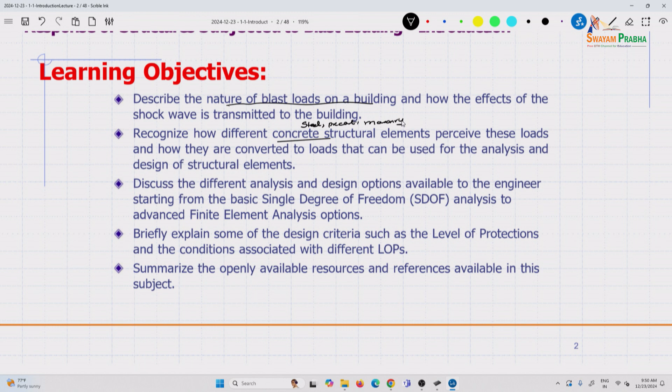I did work a lot back in my engineering days as a field engineer using IS 456 and IS 800, but unfortunately I've been using ACI and AISC documents for the last 30 years. So in some of my design presentations I'll explain those fundamentals, so I'm sure you'll be able to relate to that as well.

One of the reasons we are doing some of these things is the UFC that I'll talk about shortly. A lot of units are also based on FPS, or US customary units as they're called, foot-pounds and seconds, rather than MKS or SI systems, because the documents we will use are based on that unit system. But it's easy to convert, and we'll see if we can provide some conversions as we go along.

So you'll recognize the elements, how they perceive the loads, and how to convert a complex wave phenomenon such as a shock wave into a load that is transferable for design purposes and for analysis and design.

Then we also look at the different analysis and design options available to the engineer. In terms of analysis, we will look at a basic single degree of freedom analysis. You can do a lot of elemental designs just using single degree of freedom systems, and of course if you have done structural dynamics, you know there are limitations to it. But when we convert any complex phenomenon into something practical, we have to have tools that an engineer can use without a whole lot of background, so SDOF works in many ways. Complex analysis, as we will see, has its own limitations, accuracies, and modeling efforts, and so on.

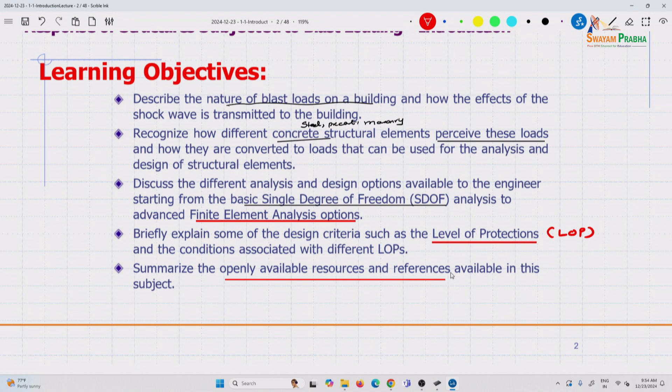This course is all based on open source material, so you should be able to download it. We're providing some of them here, but we'll see what are all the different available resources and references. I keep, even yesterday, reading an article, and there's so many new things you keep learning, reading articles from different perspectives.

What we will do is, okay, there we go. So the reason I use this is a very simple software. I use this extensively in all my classes because you can easily convert it into a PDF and then upload it, and you can download it later on.

So some examples, of course, we have a few examples in India itself. This is the Twin Towers that you've seen, 9/11, and this had actually fatalities were almost 2,000 to 3,000 fatalities.

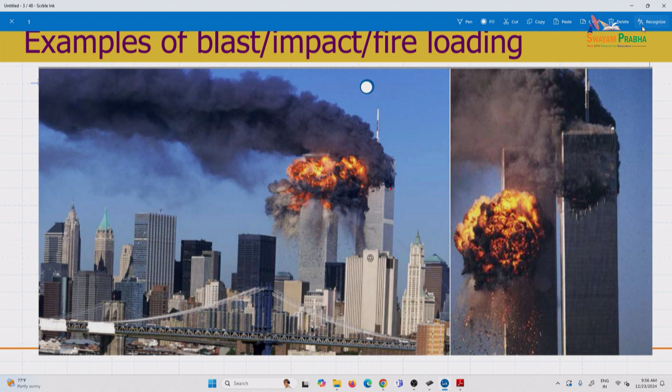Did I close it? I think.

So this had both blast and impact. Now, these are two different phenomena, physics-wise, altogether different. We can give an introduction to impact, but that will just barely touch the surface. This course will focus on blast effects on structures, because the physics, the designs, the equations, everything is very different, as some of you working in this area already know.

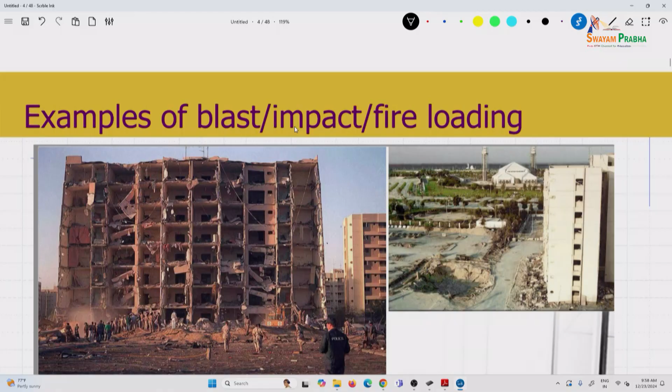Unfortunately, in structural engineering, disaster is what motivates further research. Back in the 1970s, there were extremely heavy earthquakes in the US, especially in San Francisco on the West Coast. Till then, research in seismic design was fairly minimal. But since that time, over the next 30-40 years, over $1 billion has been poured into research alone. Unfortunately, disasters are what force us to do further research, and that's what happened here as well.

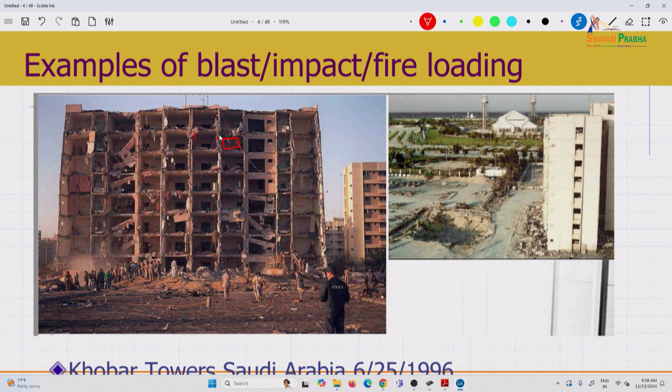So this was Khobar Towers, a residential complex. As you see, this structure was clearly not designed for blast effects. These are basically what we call curtain walls - most likely there's a masonry wall here, and another masonry wall, all separate walls. Clearly you can see the walls blown in. Observations like this prompt us to provide ways to not design in traditional manners.

Then the other effect - this is the Oklahoma City bombing. All of these, as you see, are fairly recent, from the 1990s. This is actually very close to where I live - I live in Kansas City, which is right in the middle, like Nagpur in India. This is about 2-3 hours from where I live, maybe 5 hours. This was a federal building with a courthouse. In the US, all federal buildings, the main central government buildings, are governed by a certain set of criteria.

They are not Department of Defense criteria - they are under what is known as the General Services Administration. So GSA has their own guidelines on design, and all these were designed originally as per GSA guidelines. The problem with this building is it was in an underground parking garage. There was a truck bomb placed near a very critical column.

When that blew up, it definitely blew that column away, but a concrete building is designed for a lot of load distribution and redistribution. What happened here is it was not designed for progressive collapse. So the main failure in terms of fatalities and everything you see was mainly progressive collapse. If the principles of progressive collapse had been applied to this building, perhaps it may not have had the impact that it has had.

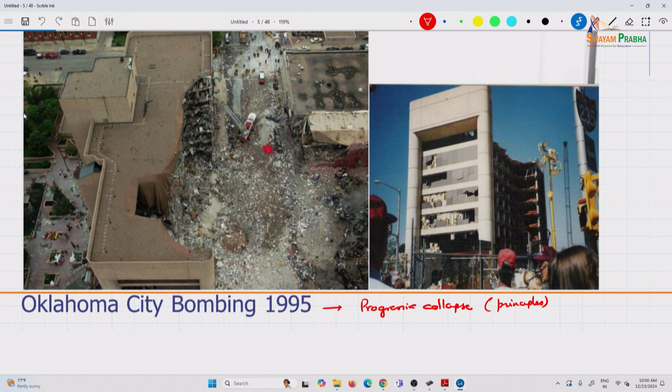That prompts changes to the guidelines in terms of progressive collapse and how to introduce those principles. There is a UFC for that also, which we'll talk about.

The other incidents I'll talk about are in Mumbai - the Taj, where you had almost 250 plus fatalities and also about 700 plus injuries. Then there's also the siege - I don't know the time, you might know it better. This also had in terms of 160 plus fatalities, and here about 300 plus injuries. So the effects can be fairly devastating.

But what we see is all this is an unusual event. The thing to keep in mind in terms of design - just like in wind you have return periods, and in earthquakes the same thing, you have return periods, though now there are other ways to quantify earthquakes. Same thing here - there is no return period. You never know what is going to happen. There are so many different factors, and that's what we'll look at later in the second session today.

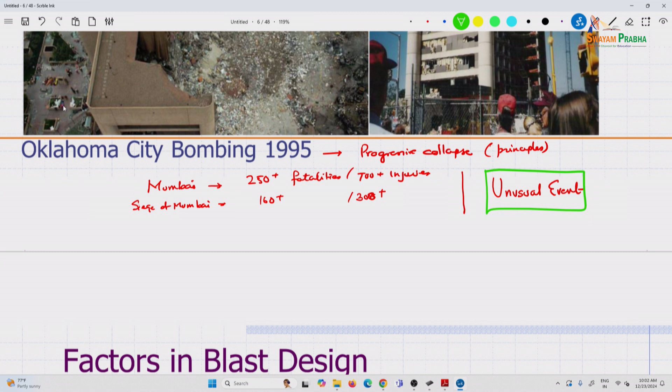So what are all the different considerations when getting into a blast design? First thing to keep in mind is this is going to be an unusual event. How do we consider an unusual event? The threat loading - when you look at dead loads, live loads, earthquakes, seismic, wind, whatever - they're all well defined. In the US, we use ASCE 7, now it's the 2022 edition. So anything as far as loading purposes goes, it's a standard - ASCE 7. India also may have an equivalent standard.

ASCE is the American Society of Civil Engineers. They have committees, and committee 7 works on this. When I started teaching, it used to be a very small document, but now it's such a thick document because they incorporated all the seismic practices into it.

The Eiffel Tower was designed over 100 years back, and the code probably wasn't even a code at that time. It still stands, and it's one of the most popular civil engineering monuments. But now we've boxed ourselves into so many constraints and very standardized buildings, but it is needed as time goes on.

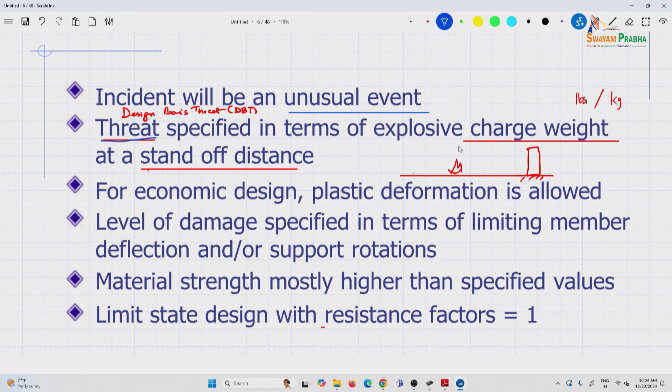So anyway, you can see this is R going up to there, and this is the weight W.

Then for economic design, just like some of you are working in seismic design of structures - in seismic design, in normal designs, in the US we have strength design, and stress design is out, but there's an equivalent called ASD, allowable strength design, in steel structures. But in all those cases, those are all factored loads.

And here, when you're designing normal, say tall structures, you're still designing at peak capacity. Every room filled with live load at the same time, the behavior is still elastic. You are not designing for plastic considerations, but of course under factored loads.

So in seismic design, depending on the expected performance, now you have performance-based designs and more. Depending on that, you do have to go to plastic design, and we'll talk a bit about designing for plastic behavior - there's a session on that as well, elastoplastic behavior, or more plastic behavior.

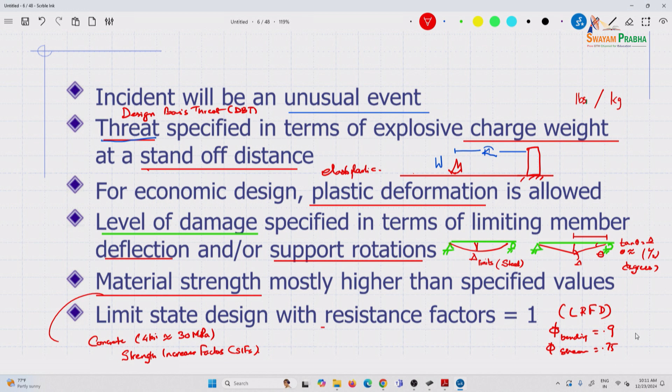Finally, the limit state with the resistance factors, we use the load and resistance factor design, LRFD. They have different factors depending on the type of material, steel or concrete. For example, steel in bending could be 0.9, or in shear 0.75. These are strength reduction factors, but in blast we assume it goes all the way to 1.

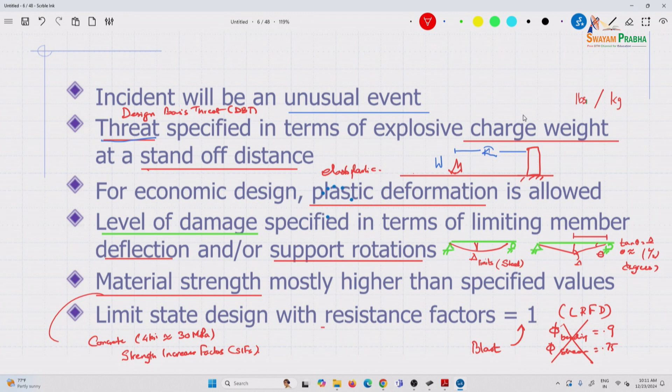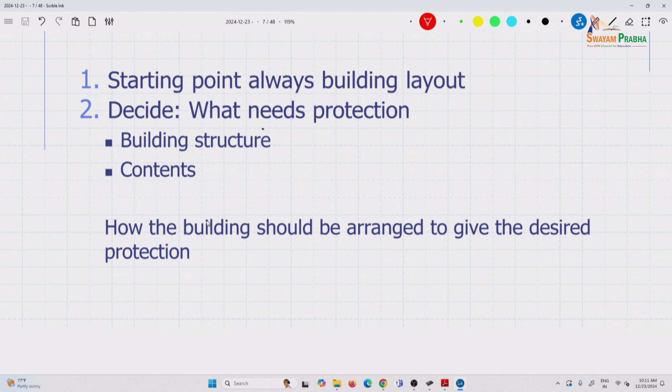In terms of the design philosophy, the starting point is always the building layout. If you're working in the US, buildings designed for blast, nowadays bridges are being considered, although codes have not incorporated this yet. People are working on it, there are guidelines, books, and articles on that. But for buildings, all DoD structures, all embassies, State Department structures, and all federal buildings are designed for blast resistance. The starting point is always a building layout.

For example, if this is your available land, suppose this is your building layout, and your building has a shape like this, and this is your access roadway. Things to consider in design are these distances, R1, R2, and so on. Other things to consider, just a few examples, would be R3, these are all standoff distances.

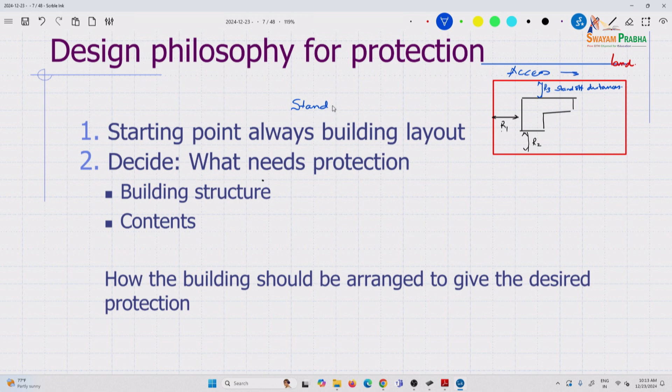If you recall the Oklahoma City bombing, that was adjacent to a road. Whereas for other types of structures, if you can design for it and afford it, the standoff distance is, as you will see later, the most important element in preventing failure for the structure. The greater the standoff distance, the better it is.

If you can afford it, and if you need to keep certain critical structures, for example your computer room or anything critical, your HVAC facilities, as long as they are away from access, you orient them accordingly, and this is something you have to work out with the architecture. Quite often architects are the first people to start this process, but as a blast engineer you have to get involved at that stage and work with the architects.

So the building layout is one of the most important aspects of it. You decide what needs protection. There are two things to consider. Quite often, as in seismic design, there are building categories based on whether it's a hospital, fire station, or a normal structure, but here the contents go beyond that.

The contents, as you will see, include a whole array starting from people, so people safety, any critical network or equipment you consider important for a structure. If it's a law office and you have to store records, all those kinds of things become important in the design of the structure. And of course, the building itself needs protection.

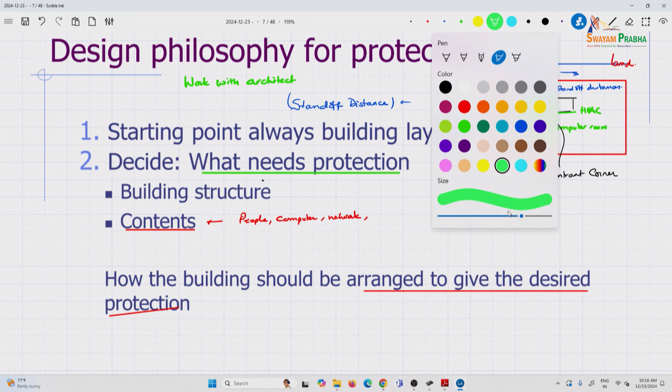Another thing that happens here is, for example, this is a re-entrant corner. So if you have a critical element placed here, this should be kept away from the source of the blast.

You're able to see what I write, right? The size-wise, is it fine? Okay, so let me know if you have any questions. So, meanwhile...

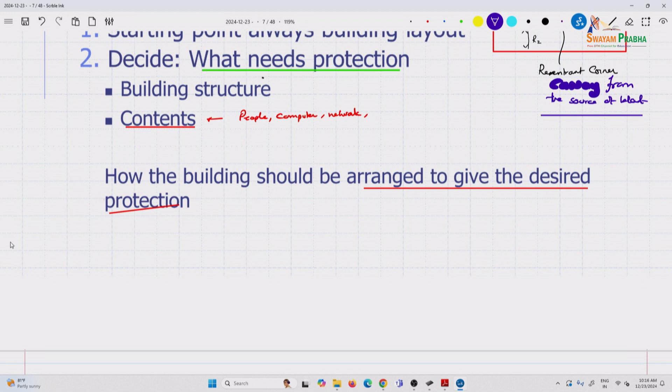Any questions so far? A re-entrant corner is where, for example, suppose you have a building like this, and this is the flow direction. Now at this corner, you can have vortices - that is a re-entrant corner.

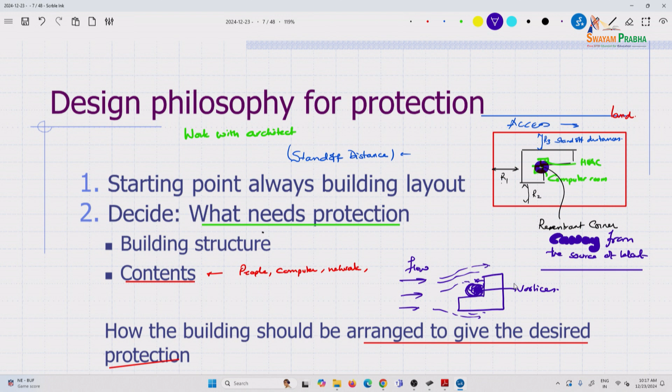In fluid mechanics, if you see the flow, it goes around here, but here the flow goes in, it can get reflected, and there is a lot of turmoil, vortex type. The reason you avoid re-entrant corners is that, if you can completely avoid them, that's the best scenario, because that way the uncertainty in the prediction goes down more than anything else.

So we looked at how the building should be designed. The next thing is, what are the building design requirements? As we talked about, the primary considerations that go in are...

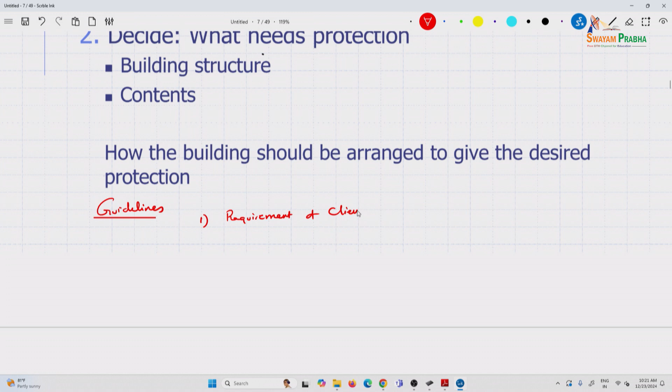There's actually another one I think we missed, so let me add that. Some of the guidelines here are: one, you first assess the requirements of the client. Then, once you have that, you look at the design features. I must mention here that quite often the client knows what they want, but as a

blast engineer, you have to educate people on what they can expect. It's not a product where you expect something and just get what you expect. Because of so many uncertainties involved, we advise every engineer who works in this area to clearly tell the client that what they get need not be exact, but these are what we know are the best practices in the field - just like doctors use best practices available. The outcome just depends on person to person. We take a similar approach.

Then the next thing to consider is the building form and facade. After that we go into the structural design itself - analysis and design. And then finally, we look at some of the internal design aspects.

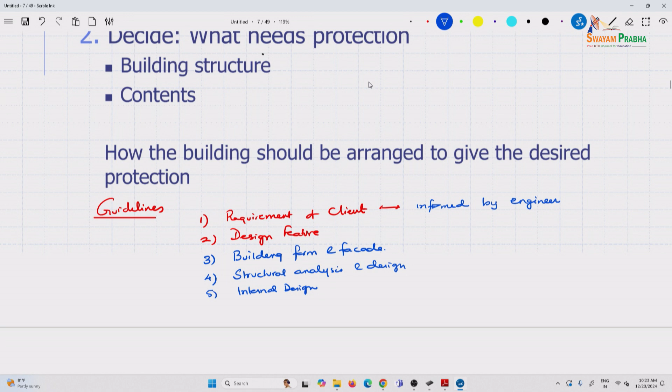For example, glazing, and doors - doors that open out are better than doors that open in. Minor considerations like this should be taken into account when designing internally.

So the building design requirements mainly aim to deflect the attack, whether by layout, security, or external devices to deflect such as bollards. These are very commonly used, along with protective walls outside. These are some ways to deflect an attack.

The next thing to look at carefully is why a particular building is being targeted. People don't choose a building at random - there's a reason they attacked the Pentagon, for example, or the Twin Towers. The mission is accomplished by choosing targets of high value.

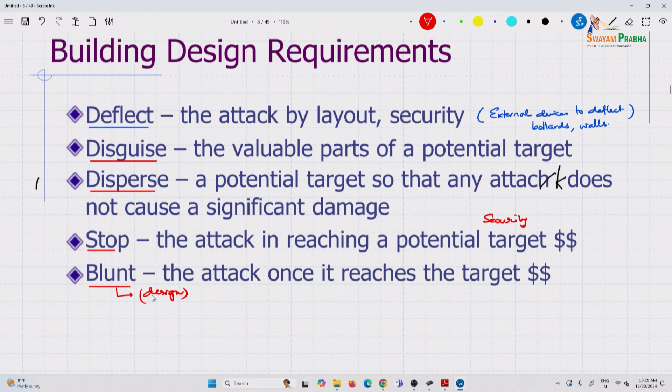So disguising the valuable parts of a potential target, and figuring out how to disperse it, means any attack does not cause significant damage. Of course, the best ways are all the security measures - TSA especially - to stop the attack. And if it does get through, this is where, as I mentioned earlier, the design comes in - this is literally the last aspect of any design of a building for blast.

I think I was a little ahead, so some of this is repeated. We'll look at each of the requirements of a client. The first requirement - there are 4 different things we'll look at - let's consider a typical commercial multi-story new building.

First of all, it is expensive to protect against blast, so as an engineer you have to consider why it is needed. If they move forward with it, that education has to come from you based on rationale - you come with reasonable calculations. Whatever we do this afternoon, we'll take up and say this is why, this is what it takes to protect that particular building, because clients, architects and engineers have a number of choices.

So the role of a designer is to advise the client based on basic principles, and some of these basic principles is what we'll cover over the next 10 days.

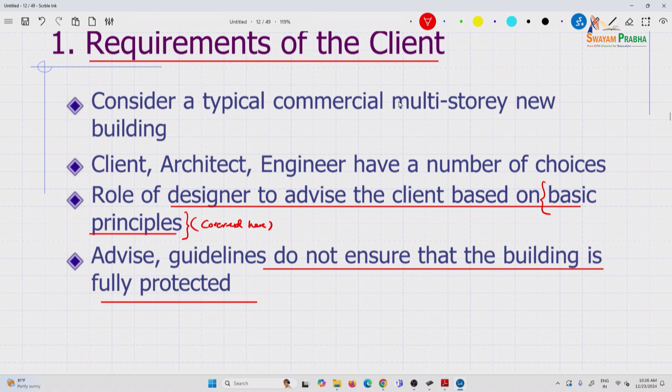Advice guidelines should remember that we do not ensure the building is fully protected. You have to clearly state that these are best practices, based on the requirements of the client. And how do you convey these requirements?

If it is a building offshore, we have for example ASCE 7, or it's a building on a coast with potential for cyclones and hurricanes, we look at what kind of wind speeds there are. We don't really need to tell a client, as an engineer I go to ASCE 7, look up the wind speeds, calculate my pressures, and design the building.

But here you have to talk about the different LOPs and where the client is comfortable in this case. We'll talk about different LOPs and how they come into the picture later in this course. Other things include blast mitigation, which we'll cover a little later.

Hardening the structure is basically adding components in addition to the primary structure, such as polyurea coatings or other such things, to harden the structure. Blast mitigation is additional things you add structurally in order to reduce the effect of the shock on a structure.

The thing that gets most affected, which as structural engineers we rarely get into, is glazing design. I've worked with glazing experts and they do their own analysis on different types of glasses they come up with.

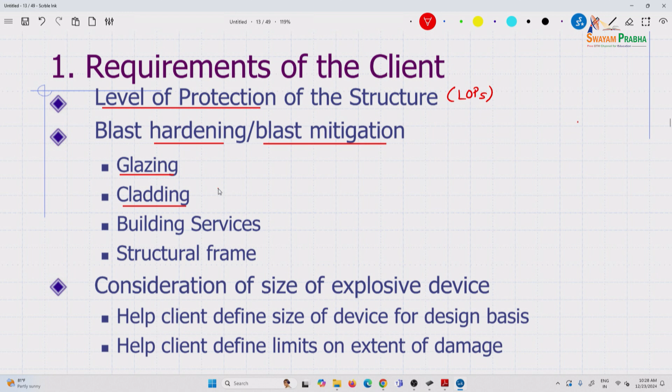Other building services include HVACs, lifts, elevators, those kinds of things, and then finally the frame. The level of protection leads to the consideration of the size of the explosive device, and we'll look at a few different types of explosive devices.

So you help the client define the size of the device, basically the weight in kilograms, and define the limits to the extent of damage. This is again based on the level of protection.

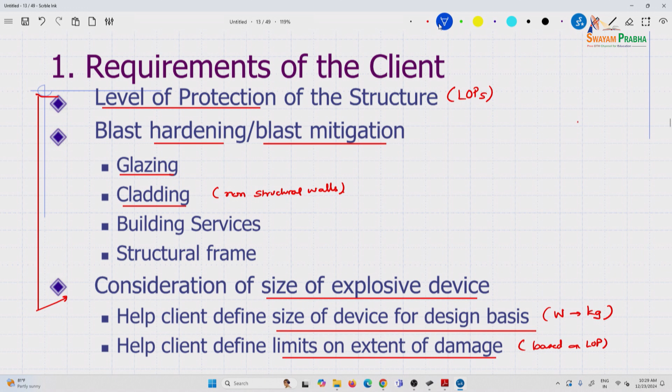The other things you can advise them on are based on your deflection limits or support rotation limits.

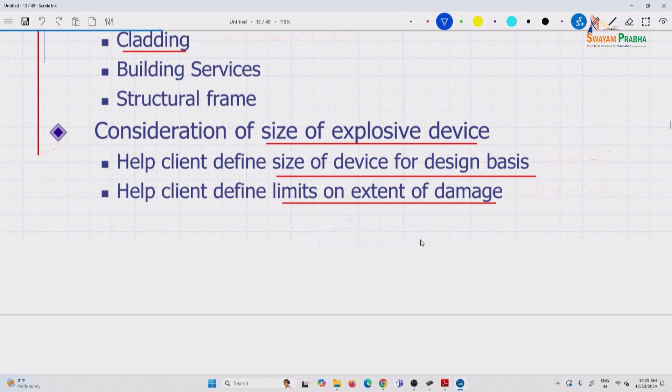So advise them, if the structure can go say 8 degrees of rotation, what does that actually mean to a client? How does it convert into what they have to do once that event has occurred?

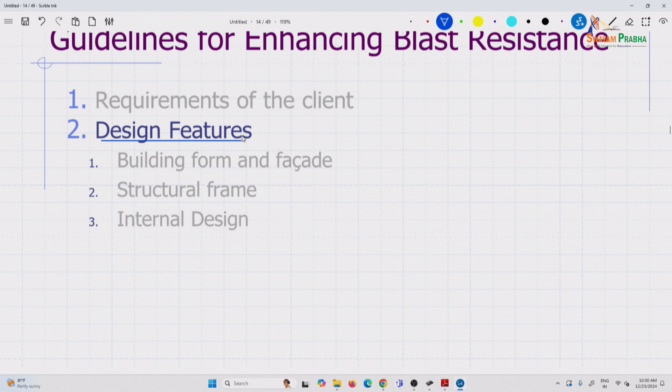Then a little bit on design features, and again this is very subjective, we'll just talk about it. Standard building design features can be at odds with blast protection and resistance. This is something we should all be aware of. Architect-engineer fights are very well known, right? You never see eye to eye. This can be even more challenging.

For example, floor-to-floor curtain walls in multiple stories designed for regular loads can be a hazard. You're changing the entire philosophy of that structure itself. In many buildings you see columns and beams, the structure goes up, and then they come in and put some masonry wall and you're done. But that's completely contrary to blast protection. That is a no-no in that case.

Form of facade failure, loss of life, internal finish - all these are different things that we have to consider.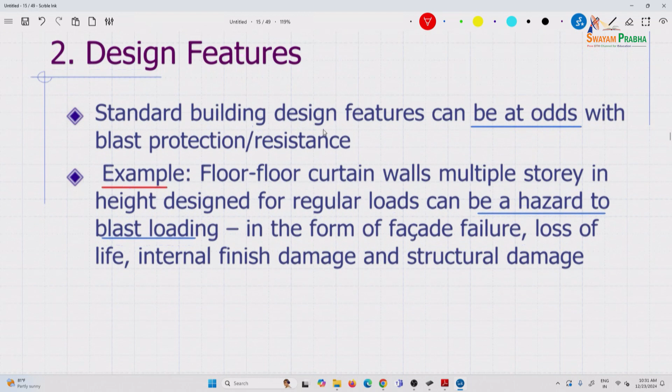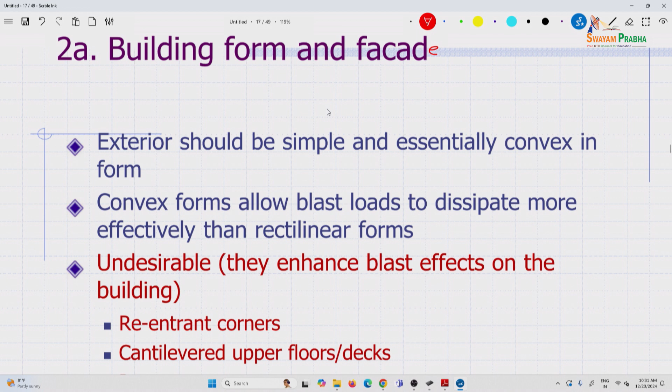Then looking further at building form and facade, the exterior should be simple and essentially convex in form.

Now why is this the case? We'll talk a little later about the type of pressures that occur due to shock loading. Just to give context, there's what is known as an overpressure or incident pressure, there's a reflected pressure, and there is also diffraction with convex structures.

Convex structures tend to smoothen the airflow around them, sort of the wave flow around them, so that reduces the resistance effects. That's why convex forms are preferable, circular convex forms.

They allow for the loads to dissipate more effectively than any rectilinear form. Undesirable, as they...

The effects are enhanced by re-entrant corners, and cantilevered upper floors and decks. It's very common, even in the lobby area, to have an 8-10 foot entrance area where cars come in, and those can be very dangerous in a public building. How to mitigate or avoid that are considerations you discuss with the architect.

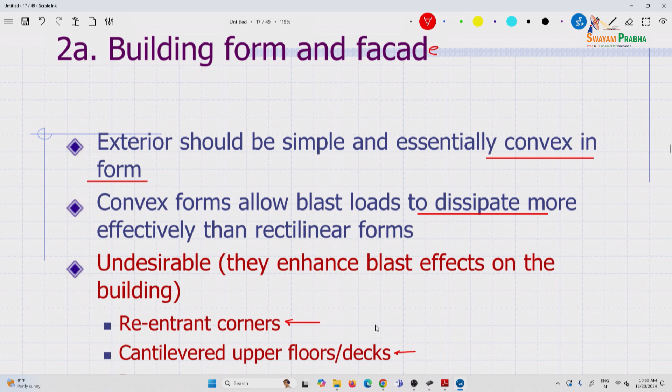So a re-entrant corner is, if this is the building, that's your re-entrant corner. And recesses, if you see, this is a building, so this would be a recess. Here you can also see there is a lot of complexity, so the pressure wave on the structure can be fairly complex in these types of configurations.

Then internal courtyards and arcades can be beneficial, but undesirable in this case. An internal courtyard can be a place where people use it as a source for an explosive. If you're not able to get a truck bomb or car bomb in, multiple people can get in with suitcase bombs and others, and that really becomes a danger spot. These are some things you may not succeed with when discussing with the architect, but you can educate the architect about them and let them make the decisions.

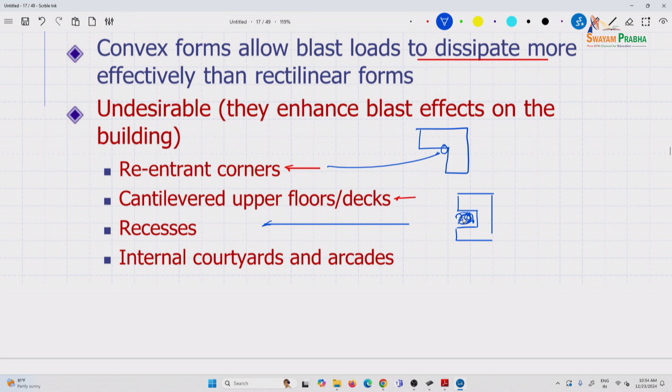If you look at features that facilitate protection, minimum glazing considerations, although there is a lot of research done on different types of glasses, using single layer or double layer glasses that don't shatter, using PVB layers in between. Those considerations can still be adopted, and that's why we will touch briefly on how thick a glazing should be, as a short topic later on. Minimum glazing considering aesthetic, thermal, energy efficiency, acoustic, and lighting issues in parallel with security issues.

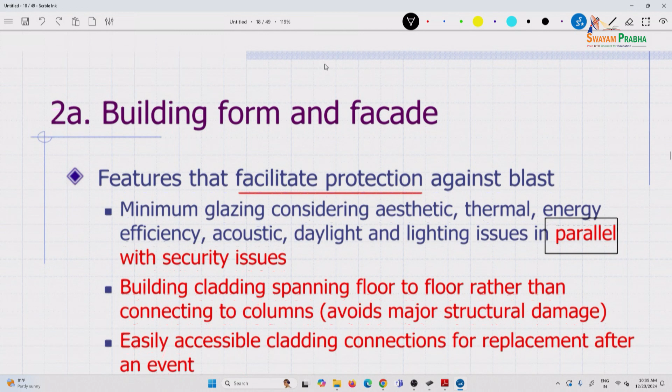Then building cladding spanning floor to floor rather than connecting columns. Let me get a quick drawing here. If you're connecting columns, these are your two columns here in this case.

Spanning this way, building cladding spanning floor to floor rather than connecting to columns avoids major structural damage. This is just in how you design - for example, if you can have a continuous connection into the beam itself, you're avoiding a blowout, because it's hard to connect into a column, but into a beam and a slab you're able to connect it better, avoiding a blowout into the room itself behind it. That is one thing to keep in mind.

Then easily accessible cladding connections for replacement after the event. And again, the recesses we talked about - apart from the vortex flow inside the recess, it's also to conceal, because that's a place where explosive devices can be concealed.

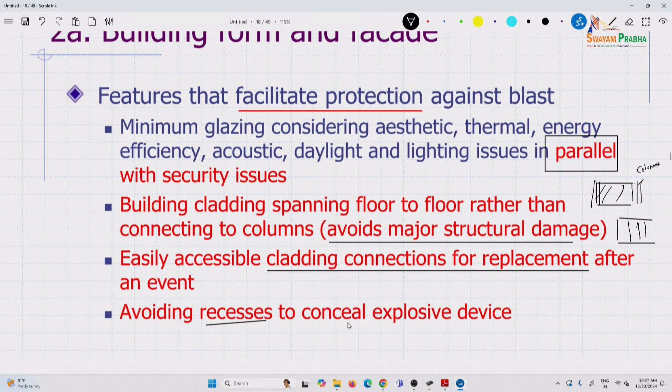Continuing further, features that facilitate protection - avoid deep window sills and surface profiling which can augment blast loading effects. Keep the windows in line with the structure, with the walls itself, and especially if the windows come out rather than come in, it's also a helpful feature. You can have catch curtains in the back, but those are additional things you really need to do only unless it is actually required. It's a very critical location.

We go till what time? 12:15, right? No. 11? Oh, 11, no? So I better hurry up.

We'll take it as it goes. There's a lot more to go in the first one.

But then avoid window openings - I talked about this. If required, have openings that open outward rather than inward.

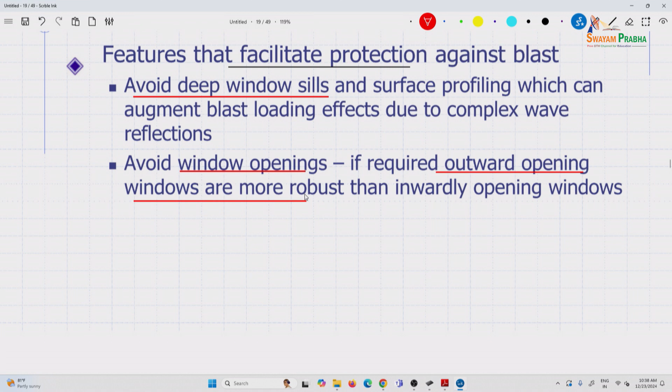Then coming to the structural frame - this is where we as structural engineers come in and we're most comfortable within our zone, so to speak. From a structural frame perspective, the essential requirement is the structure be well tied so that its overall inertia is used. What does it mean?

In seismic design, you go low mass, right, low weight. Why do we lower the weight? Because you're going to reduce...

Any other reason why you want to reduce weight in a seismic environment? The building weight is lowered. Inertial forces, right? What is inertial force? Mass times acceleration, so less mass means less inertial force. But in this case, what do you want? More inertia. So in blast, it's just the opposite.

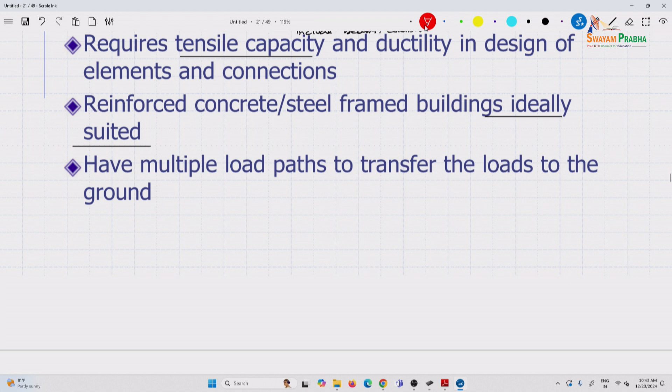Let me go back a bit - I want to spend a minute on ductility. What is ductility? Can anybody define it? Deflect more without loss of load - that's the second part. A lot of structures deflect a lot, but without loss of load is very important.

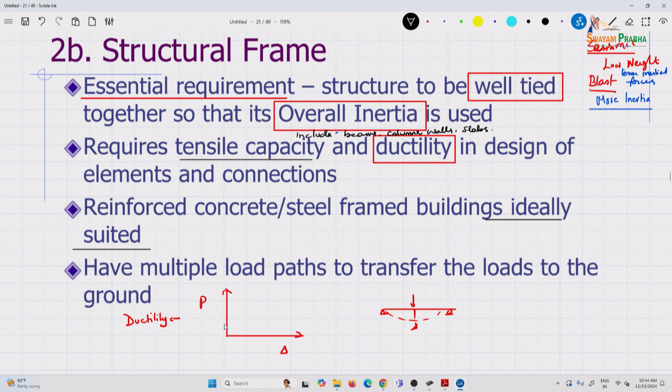For example, take a structure with load P versus deflection delta on a simple beam. In one case, P versus delta goes up and then fails; in the other case, with the same deflection in both, which one is more ductile? This one. Quite often people think ductile just means a lot of deflection, forgetting about the second aspect.

So keep that in mind: ductility is large deflections without, or with minimal, loss in peak load capacity. It takes a lot of detailing, primarily detailing. This is not necessarily a strength criteria because structures can achieve strength.

Quite often it comes from how moment connections are detailed. Quite a few structures designed for blast are derived from principles of seismic detailing, so you start somewhere - a lot of research has been done. For those not familiar, have you heard of AISC? It's the American Institute of Steel Construction.

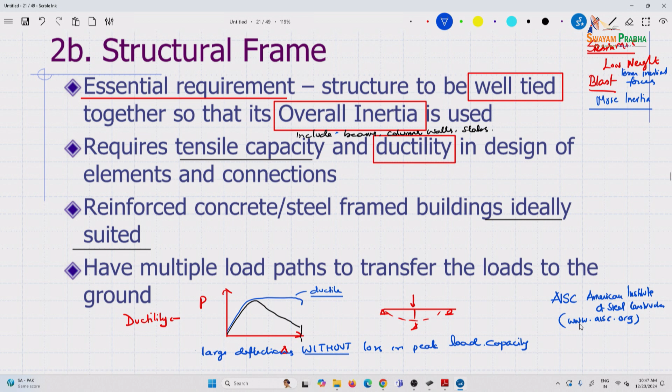So this is www.aisc.org. Just like you have IS 800, AISC is the document for steel design, known as ANSI 360, that's the steel design code. They have put out a whole seismic manual. It's not exactly a code, but they have a lot of seismic detailing requirements. You can purchase a whole book covering many of those principles.

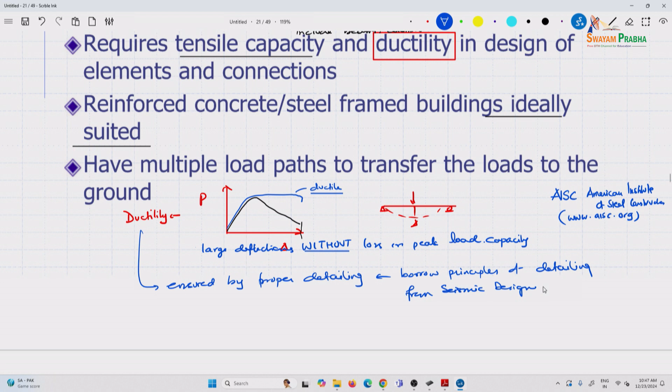Ductility is ensured by proper detailing, and you can borrow principles of detailing from seismic design. There is also a variety of design guides for detailing moment connections, especially in steel. There's a whole big book on that, and you can always look into those resources.

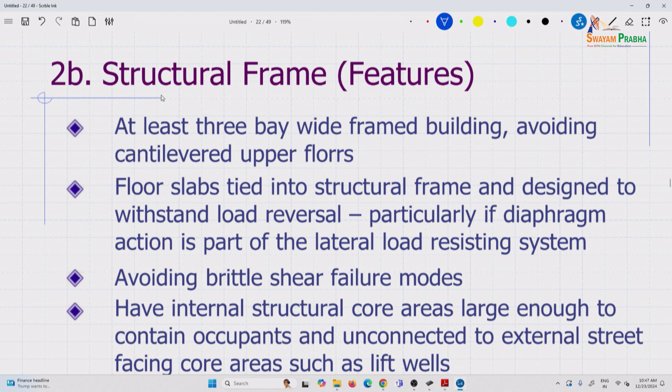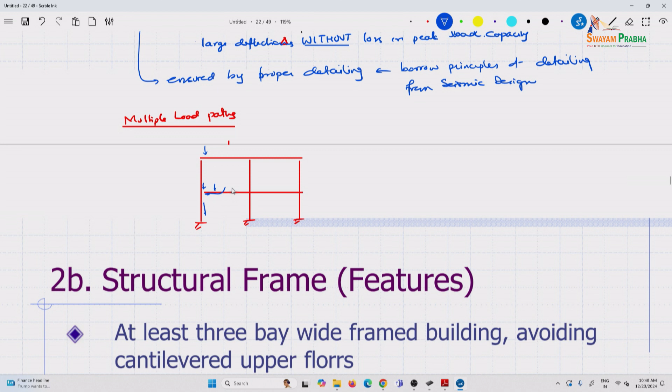Then the other thing we talked about is multiple load paths. So let me briefly talk about it. For example, you have a building here this way. Quite often you design for loads coming down the column, so loads come up and down the column in this manner. But when you design for multiple load paths, you may also have to design the building for something like this.

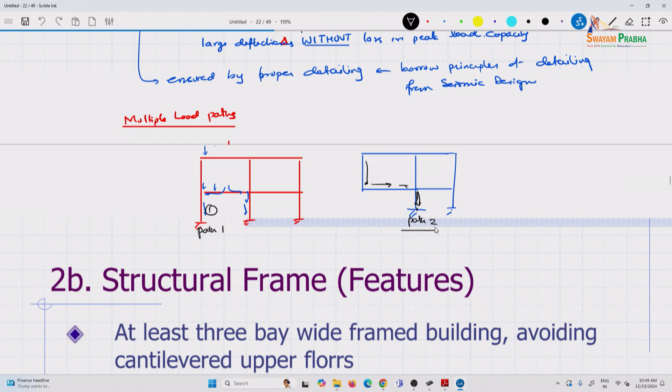Now you have another pathway for the same load to come down. This is pathway 1 and this is pathway 2. This will require additional design work, but it also adds to certain costs. So all these things need to be considered. Multiple load paths, especially in design, are very important.

You can't predict everything, so that's why we are engineers, right? What does the word engineer mean? When you are engineering a building, any of us, 15 or 20 people, can design it in different ways, but the building will behave the way you have designed it. Each solution is the right answer because the load path will go the way you have designed it. If you don't want the load to go through a certain beam, you can design it that way, make the beam less stiff, and it will go elsewhere.

It's very interesting. The first building I ever designed was when I finished my MTech and got a project to design a multi-story building. We had a corridor, and my boss wanted the corridor to be spanned by a continuous beam going all the way across. Then I saw the corridor was only about 1.5 meters or 5 feet wide, while the rooms were about 30 feet long.

This particular beam, analysis-wise, was attracting so much moment. I said there's no way I'm going to design this for that moment. Why was it having so much moment? That beam was spanning—let's say you have a frame like this.

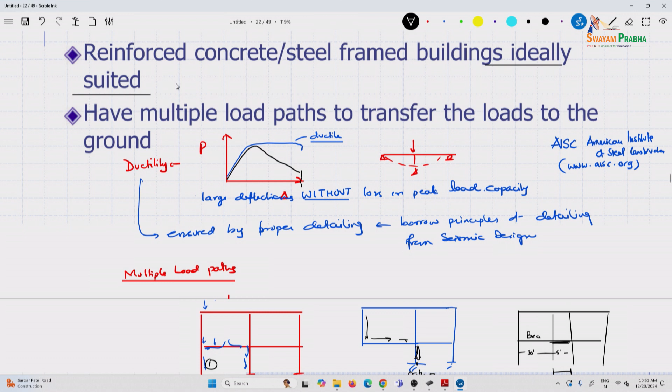So these things you don't learn in a classroom. You go there and then you say, I can't design this. So what do you do? You separate the two buildings, make it a simply supported beam, so that's where the beam is. These are some things to keep in mind as you practice. When you do even multiple load paths, you could run into issues like this, and then you must consider how to avoid it and what other design aspects matter.

That's where, as engineers, we are really given very few opportunities to be creative. Architects are the creative ones; they've taken 95% of the creativity in a building. We bring in our creativity in this manner.

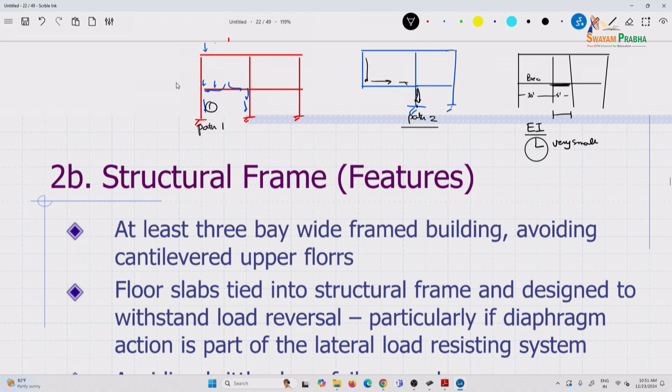Other simple things to consider: at least a 3-bay wide frame building, avoiding cantilevered upper floors—we've talked about this. Floor slabs, also discussed, should be tied into the structural frame and designed to withstand load reversal. Most of the time we design for gravity loads, but explosions can load structures the other way around too, so you'll have to reinforce differently, particularly considering how slabs act as part of the inertia through diaphragm action.

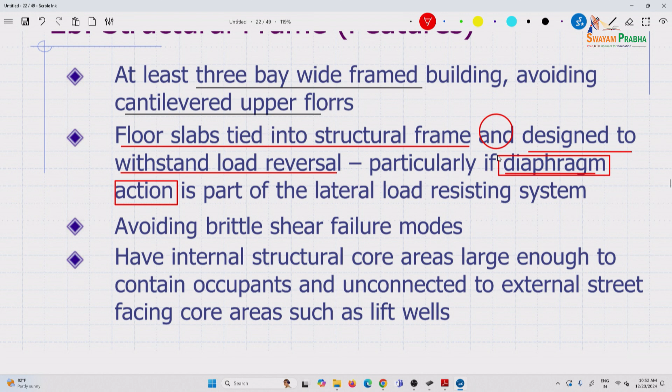Taking that as part of the load resisting system itself is very critical. The next point: avoid brittle shear failure modes. Brittle shear failure modes are catastrophic.

So detailing for shear and increasing shear capacities, such that your goal in these cases is that flexural capacities should govern. Primarily this is because flexural behavior is more ductile, while shear is a brittle behavior.

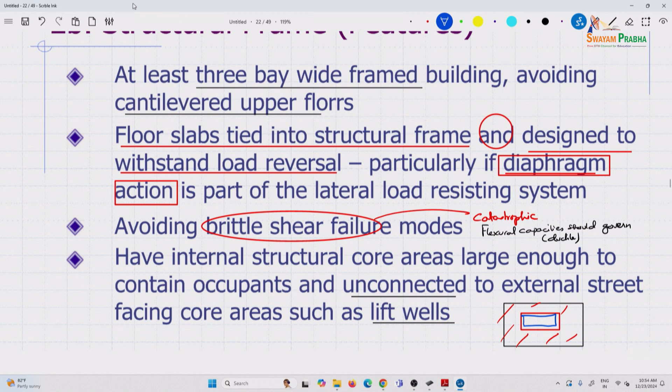Have internal structure core areas large enough to contain occupants, unconnected to external street-facing core areas such as lift wells, so you can evacuate. In this case the load from an explosive is not transferred to that particular structure. You might have an outside core, for example, so this is your building, and this is part of it. If you have a completely separated internal core, you'd recommend two walls or something like that to prevent... it's hard to predict anyway, but if that's an option, you could look into it.

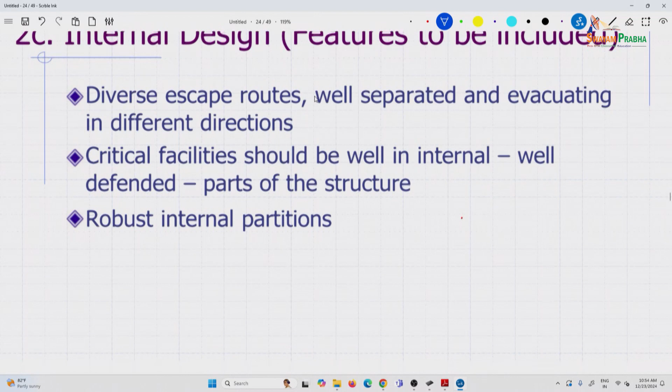Then we talked of internal design. If you remember, these are the different things we looked at: have diverse escape routes, well separated, evacuating in different directions.

Again, as engineers, we don't get much exposure to blast design. Imagine architects - they are not exposed to this at all. There are bridge architects, because you can still make a living designing bridges, but you're not going to make a living as an architect doing just blast design. So it often becomes an engineer's role to educate the architects. Critical facilities should have well internal defended parts and very robust internal partitions - these are all basically containment strategies.

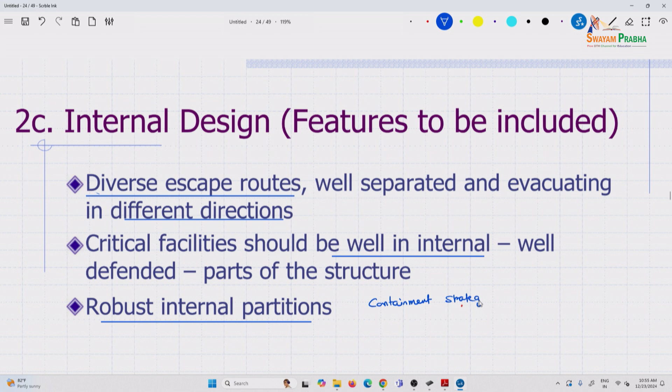So what are some of the important documents? Again, I go with what is available that you should be able to download, and we'll look at several of these over this course. The first is UFC, the Unified Facilities Criteria.

Now, as of October, some things - the way repositories are set up - are changing. Before, I think this website may not exist anymore. I just checked, and I think when we were designing the course, when I last taught it, it was still there. I teach this course every summer, a course similar to this. WBDG is the Whole Building Design Guide, but now I think that goes under NIBS, so the repositories may look different. It will still lead you where you need to go, they just haven't quite updated it yet because the work started in October, I believe.

This is DoD's minimum anti-terrorism standards for buildings, UFC 4-010-01, and there are other releases as well. Then the UFC document we will be using quite extensively is 3-340-02. You'll read papers in this area, and a lot of them will refer to 3-340-02 - that is Structures to Resist the Effects of Accidental Explosions.

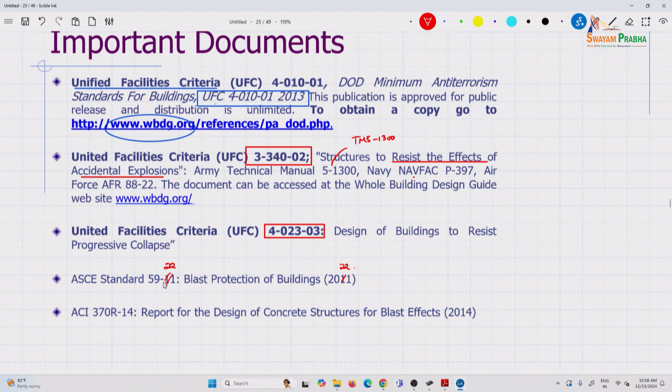22 is the latest version of it, the ASCE standard - ASCE being the American Society of Civil Engineers. Committee 7 works on load standards, on loads, while Committee 59 is on blast protection of buildings. It doesn't get updated every 6 years like the others do - this one got updated 11 years later. I am the chair of this committee, and we worked quite hard to update this document, so hopefully this should be called 24 or 25.

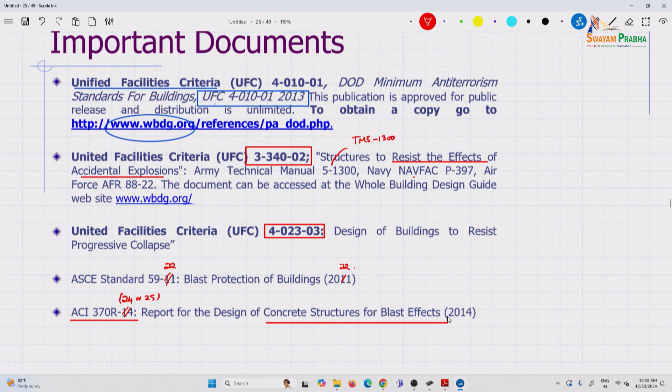We worked through the whole process, and it takes a couple of years. I started the process to update it in 2022, and in 2024 I finished my term. It's continuing with the next chair, but it's still not completely voted in - these things take 2 or 3 years. This document you can purchase; it is not a free download. Both of the ASCE and ACI documents are not free, but the first three are publicly available.